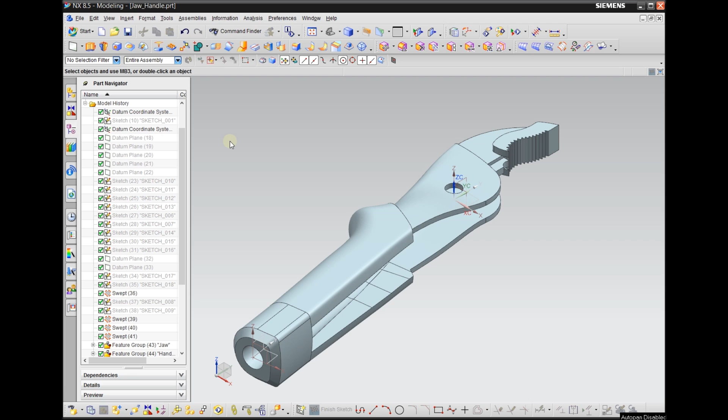Okay, this is a video on how to make the jaw handle, and there are detailed steps on the slides as well as the dimensions.

So here is the jaw handle, and how it's made. It's made of the first part, that's your jaw, which is actually the same as the lower jaw.

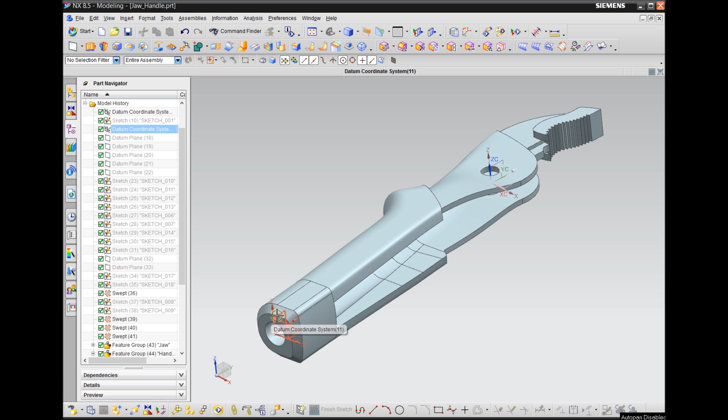Okay, and this is your metal part. So you have your metal, the real thing has the metal handle all the way to the bottom, but in modeling we only model the bare part of this metal, and coming down it's your grip. There's a rubber grip outside of the metal handle. So for the model, we're gonna model this whole piece down here as your grip.

We use two swepts for this metal part. We swept the outside shape of this metal part, then we also swept the inside. Then we use subtract to cut this part.

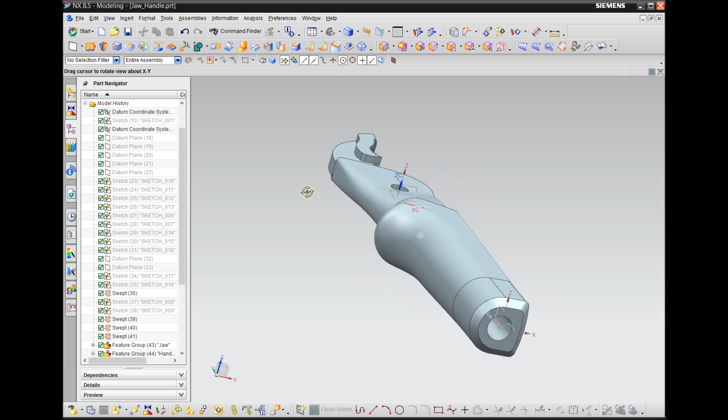And for the handle, the grip, we also use swept, because this shape is kind of very hard to extrude or make using other methods. You're welcome to use the method for the handle which is all extruded, and you do edge blend, and it's gonna be a little bit off here, but that's fine.

So this is also two swepts. You have one swept for the outside, and the second swept to cut into this grip.

And later on, for this part, it's gonna be an extrude. So you can extrude all the way to the bottom, then you do edge blend or chamfer, but chamfer will not give you the same radius here. So I used a swept, and this is a very simple swept, so don't worry about that.

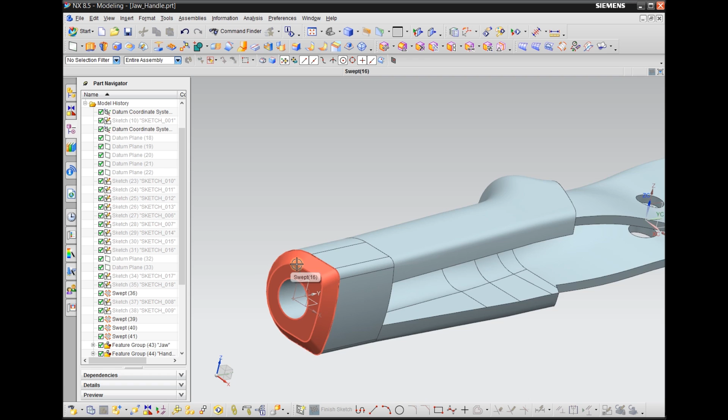Okay, so now let's start with the jaw and the metal parts. Probably this grip is gonna be in the second part of this video.

Okay, so let's build a new file first. It's gonna be model, and just keep this name, or you can rename that, and choose inch as your unit.

So I'm looking at the slides, so I will follow the slides. So first, actually we don't need to build one. Okay, so first you want to open your lower jaw.

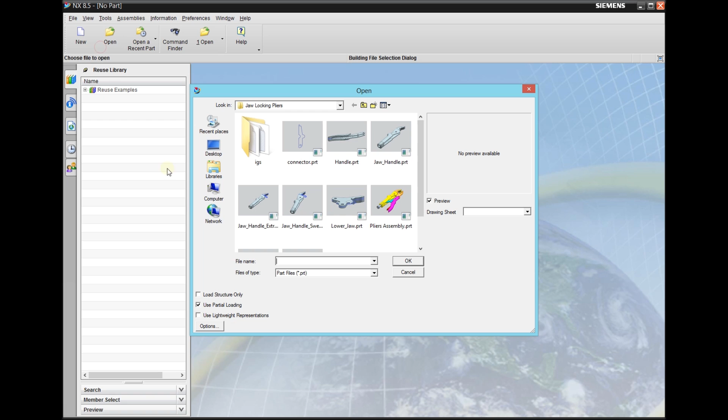Since these two, the left and right jaw, are the same shape, you don't want to do that again. Okay, we can save as this file, and you can call it jaw handle or anything. So now we are in another file, and then NX just closes that lower jaw file. So all of this will be our jaw handle.

And if you notice, the geometry here is actually this cutter. On the lower jaw it's a blade, and here it's actually like a cutting board. It's flat here.

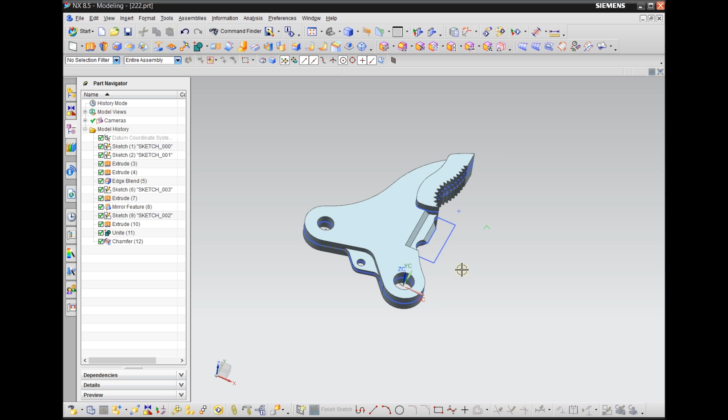So go back and modify this sketch. Okay, and apparently we will have this. We can keep this, but we're gonna delete all the stuff that we don't need.

That means this too, we don't need this little ear, we can delete it, and we don't need that sketch either. Just delete that.

And let's see what we have in the first sketch. Okay, for this sketch, you want to modify it into the shape that's listed in the slides.

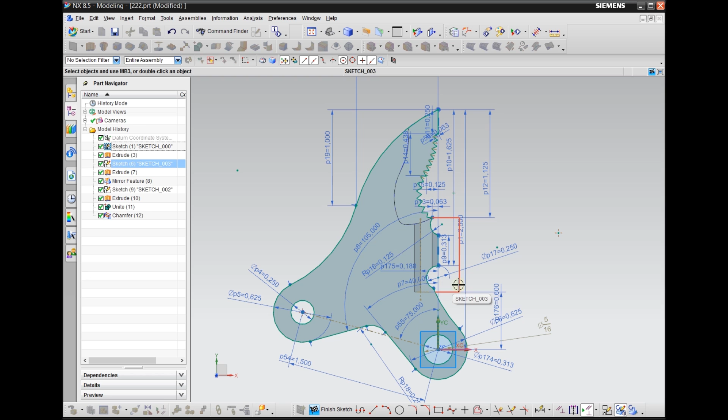So switch to wireframe and hide the extrude. Okay, maybe I can also hide this, hide the teeth. We don't really need to do anything for the teeth.

Okay, and here we don't need this. We don't need either of these two circles, so we can delete all the stuff here.

Alright, and if we look at the slides, the dimension is from this point to that point. Well, I need to delete this first. It depends on your sketch really, so everyone has different sketches.

And I'm gonna extend this curve first. Okay, so I just pick the x-axis as the boundary curve, and then we can extend this curve.

Alright, so the length of this cutting board is, I don't know how much. I only know the height of this cutting board though. So I can use a curve to cut this and give this curve a dimension, which is 23 over 32.

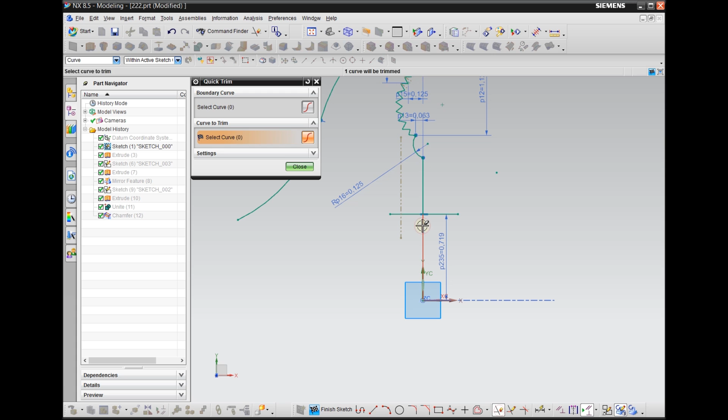Okay, and we can use quick trim over this, then you can delete this curve. So we have this cutting board down, and we don't need this curve actually.

Okay, delete this, and you're gonna keep this curve so the top can match your lower jaw. And let's see,

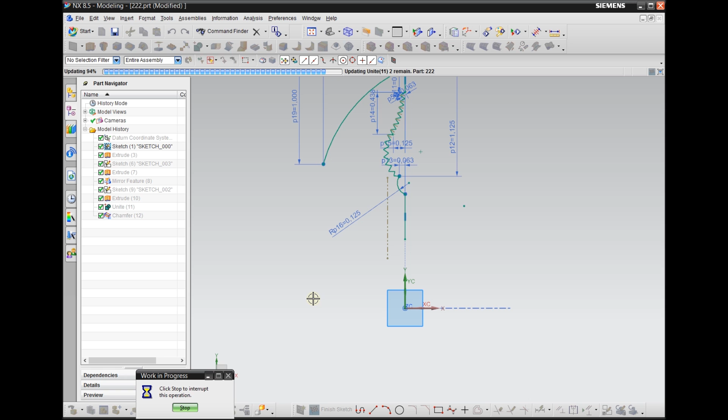Did I put any dimension there? I don't think so. Well, okay, let's measure from the... yeah, it's gonna give me an arrow. Doesn't matter, I'm gonna measure from this.

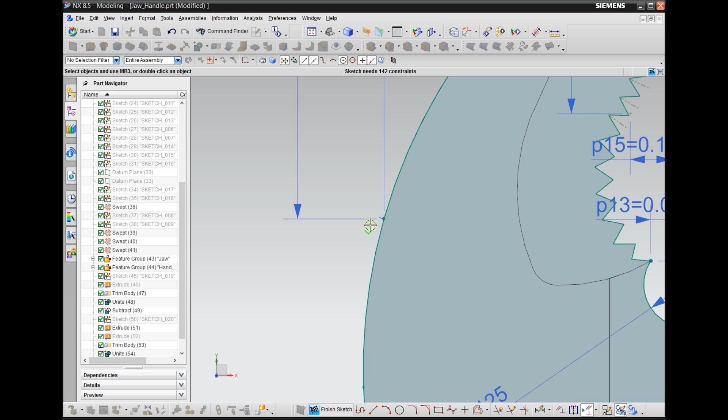Show parents. Show parents. Okay, then this is our sketch, and okay, I have a tangent arc here all the way down, and

What about the radius? The radius is 39 over 64. So you don't have to have the same shape as mine, because everyone has a different shape. Okay, so I'm gonna do this as my shape, 1 plus 39 over 64.

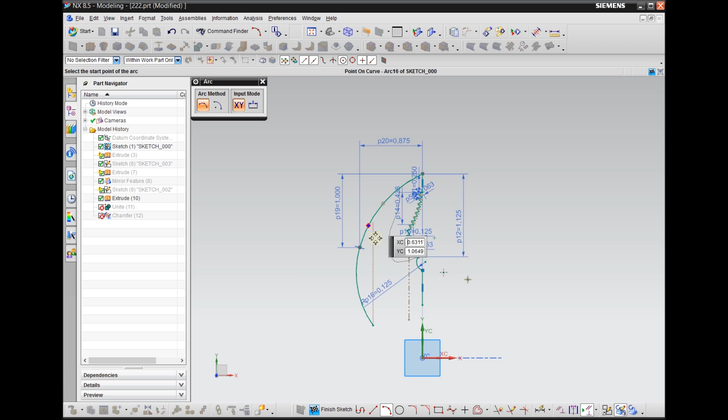So we're gonna use this 3 point, first point, and I don't know where the second point is. I just click anywhere and make it tangent. I guess I don't really need to measure that. Make sure this point is tangent, and this point has some dimensions. We'll have a look from this point to the origin is 31/64.

Close this reference, we don't want to use reference. Here to here, it's 31/64. Okay.

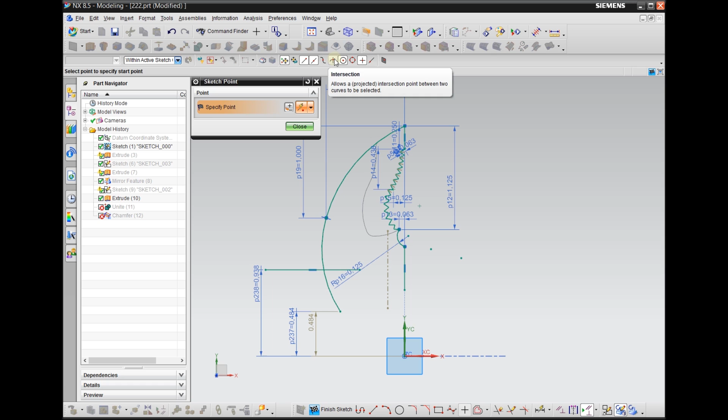I've drawn the line here, a horizontal line, put a dimension, the height of this line is 15/16. That's gonna be the reference point here. We're gonna add one point here, but also we need to add one point first, and make sure you use intersection snap. Snap to the intersection, close, and we can make this line to reference. Let me add this dimension from this point to the center. In my geometry, it's 15/16.

So you don't have to do this because the bottom part, they're gonna enter the metal part, so they're gonna bury it in that metal part, so this shape does not really matter that much. To me, I want to make sure, well, let's finish this first. We'll come back and modify this. The extrude gonna be screwed, but don't worry about that.

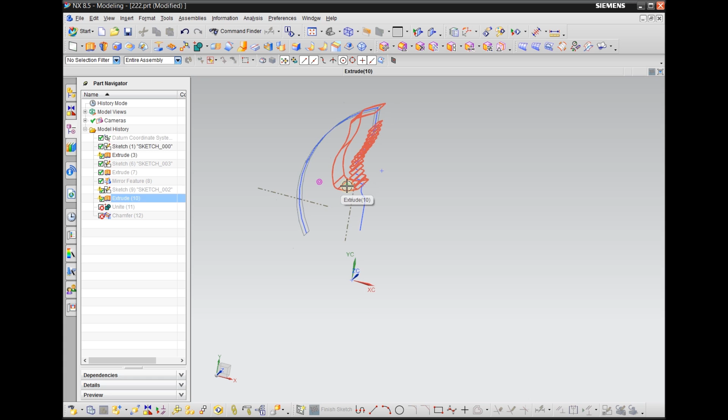Chamfer, we don't need that chamfer too. Unite, don't need this. That extrude, yeah, because I modified that. Modified this. I'll just stop, don't put this dimension now. Keep everything as usual. Delete this, delete the unite, depends on what you have.

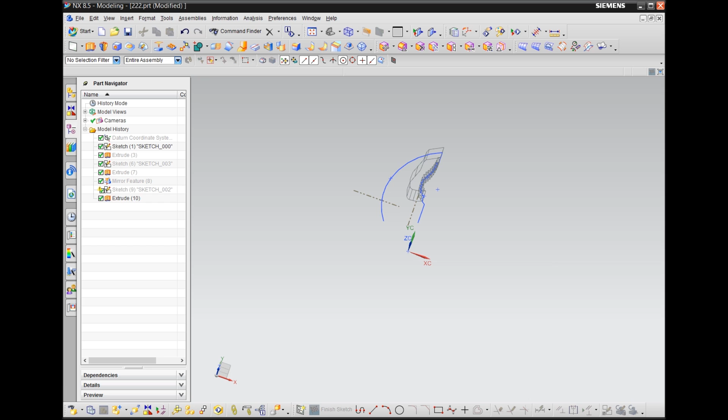We can add the second datum coordinate system for the handles. Though the handle part, they're gonna be tilted. So come here, datum coordinate system, and I think we first need a reference line for that datum system.

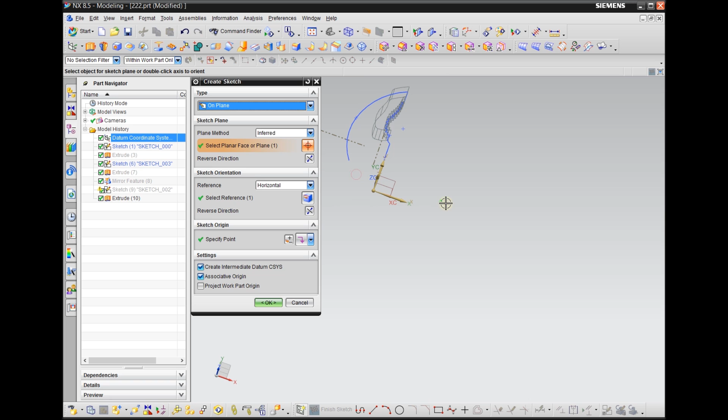So we need a sketch. Click sketch on y-x plane. I need to show the datum, first the datum coordinate system, okay, gonna be y-x plane. Click OK, and I will need a reference line. That's the direction of your handle. Turn that into a reference.

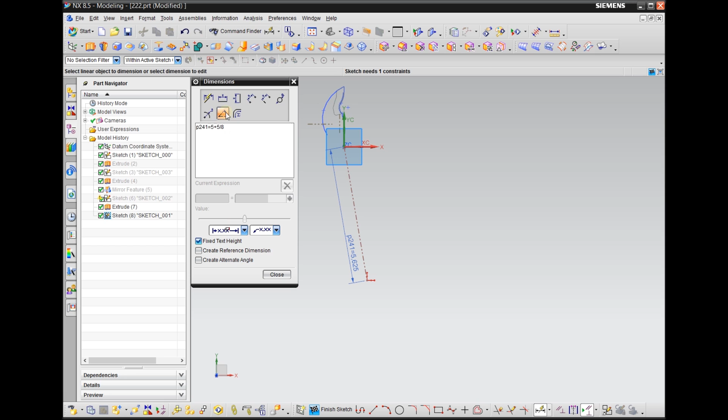Now we add constraints. We can use parallel dimension for this. The length is 5 plus 5/8. Now we can do the angle dimension. We can pick y direction, and this line, the angle here. Actually I didn't want that. Well, so in the slide that's 8 degrees, so 180 minus 8 degrees, 172. Press enter, click OK, close.

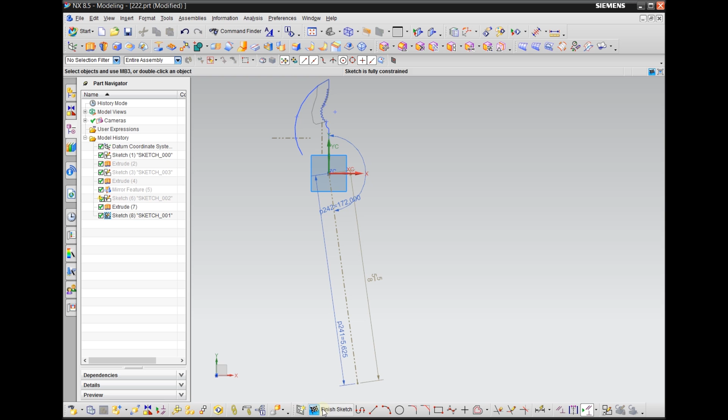Then we can add the datum coordinate system. We can use origin, X and Y. That means we need another reference line, so come back to the sketch. We need another line that's perpendicular to this, so we can have two axes when you pick the coordinate system. And we are done. Make this reference. The length doesn't matter. Finish sketch.

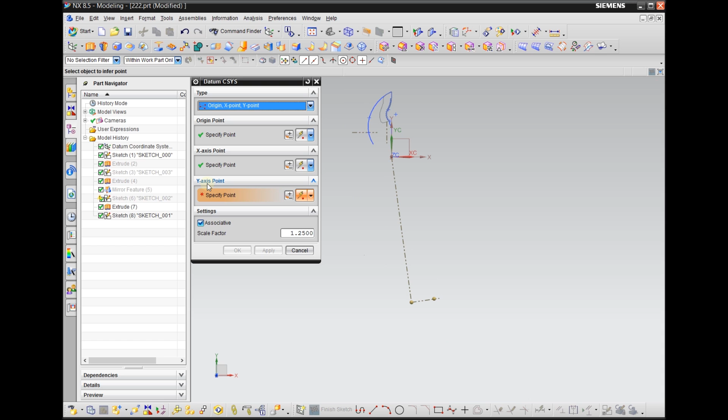Click here, datum coordinate system. We're gonna use origin, X and Y. So first specify the origin point, that's gonna be here. X, so our original X is here. We can pick this as your X, and we pick the point on Y-axis, gonna be on this. We can pick this point. So you have Y-X, and click OK. Now we have the second datum coordinate system.

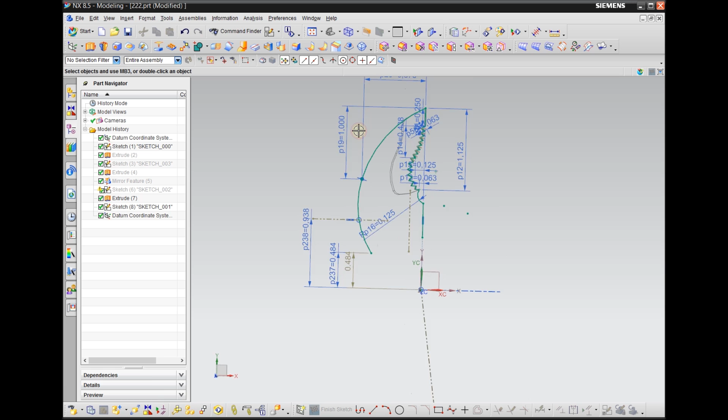So why do I want this? Well, the lower handle is tilted, and I think this point is, yeah, so this point is not that easy to find, huh? Radius.

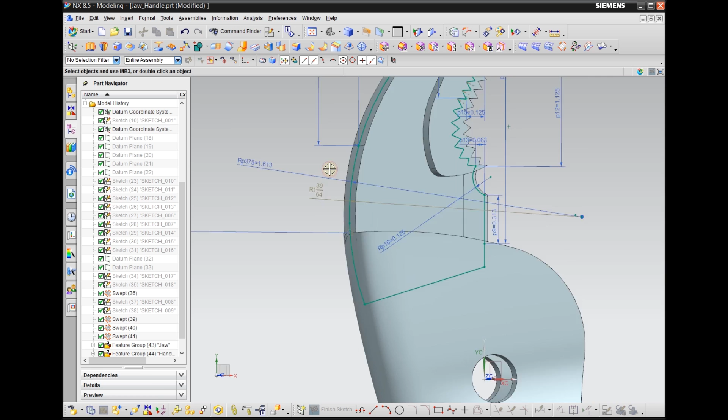Nope, I want this. I don't want a reference, I want a real one. Close. And go back to my jaw handle. Measure the radius, that's 1 39/64.

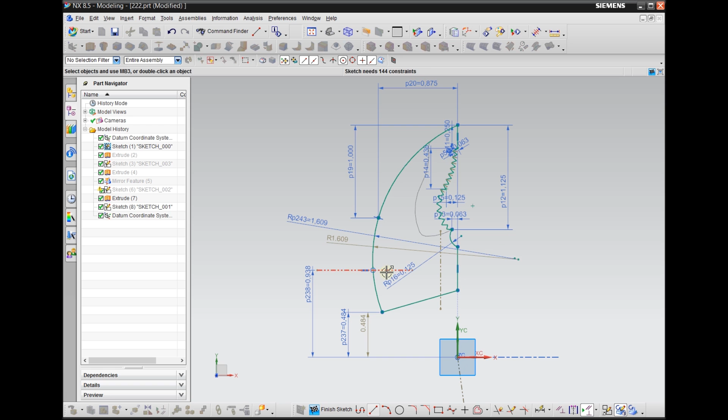I'm trying to fix this, 1 plus 39/64. I think that worked. Okay, it's still there, and it is still here. Also another line. So now it matches the shape in the slides.

Let's have a look, finish the sketch. A lot of warning. This extrude is weird. Once you double click that extrude, everything should be back. If not, you can always deselect the curve, and that's what I'm gonna do. Deselect, and let's try connected curve. So it's gonna be symmetric at 1/8. Click OK, and show it.

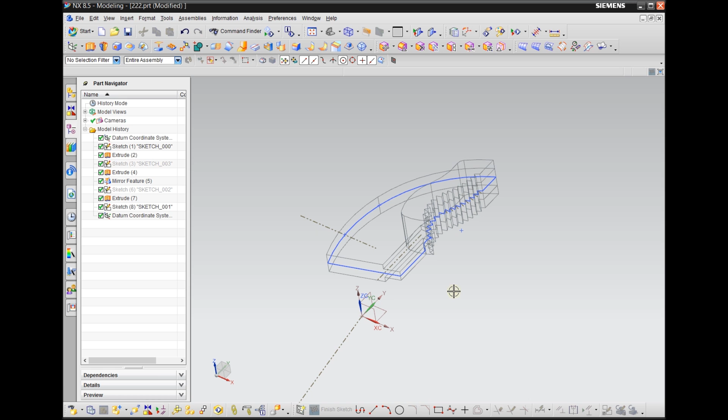So since we have cut, we have cuts here, you don't have to modify that already. So we have this and that, now they're two different solids. We can unite them together, or we can just leave them alone. This sketch, yeah, we don't really need.

All right, so we are done with the jaw part. We can come down to the metal part, the metal handle.

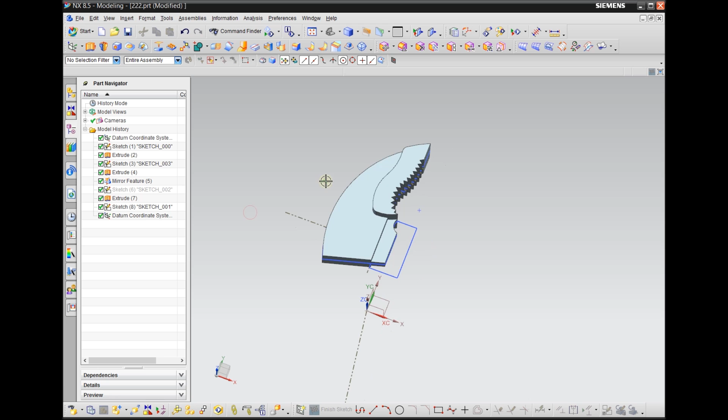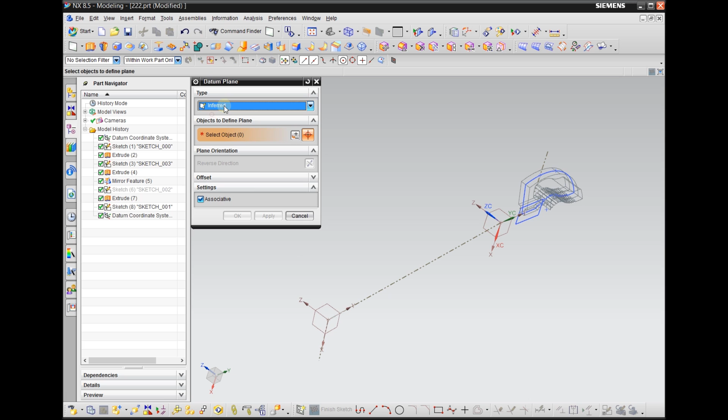So first we're gonna build 3 datums for your 3 cross sections. The first datum gonna be at a distance from the bottom of the handle. Try to pick this. Okay, inferred. Oh, we should try that distance actually. So this one, the distance of this datum is 3.9375.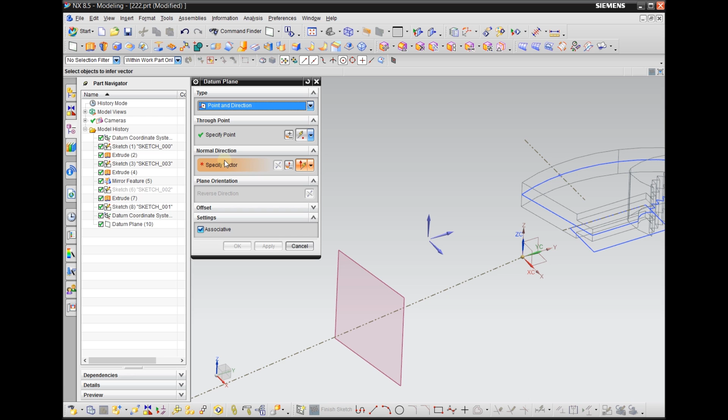And the second datum is gonna be on the origin of your absolute coordinate system. So now we're gonna use the method point and direction. We need to specify a point, that's gonna be origin. And the vector, we pick this reference line. So this datum gonna be normal to this reference line. And click apply. Okay, and you can have a look, they are perpendicular to your reference line.

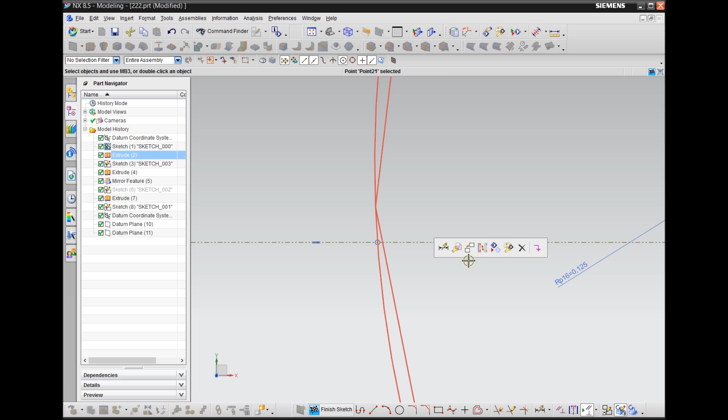And the third one, let's cancel this first. Third one is gonna be on this point, the one we just added. So what we do is we can turn this point to reference. Okay, hover and then quick pick. Turn this to reference, or we can just leave this alone. But I like them to be reference, so they will not be modified.

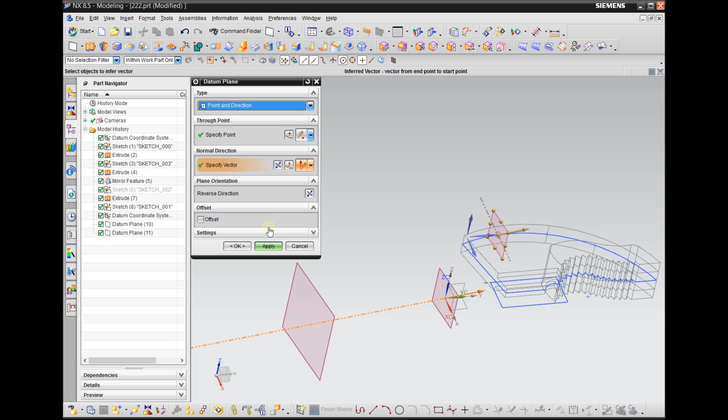Okay, the third datum, again, it's gonna be point and direction. Specify the point, it's gonna be this point. Okay, be very careful of picking. So end point, no, I don't want existing point. Okay, existing point. Pick this, and the direction is this one. Okay, let's have a look first.

All right, now we have 3 datums, and if you don't like the shape, you can move it around, and put the point back. Well, make it bigger.

Yep, so here are our 3 datums. So next we're gonna draw 3 cross sections. So let's start from this one.

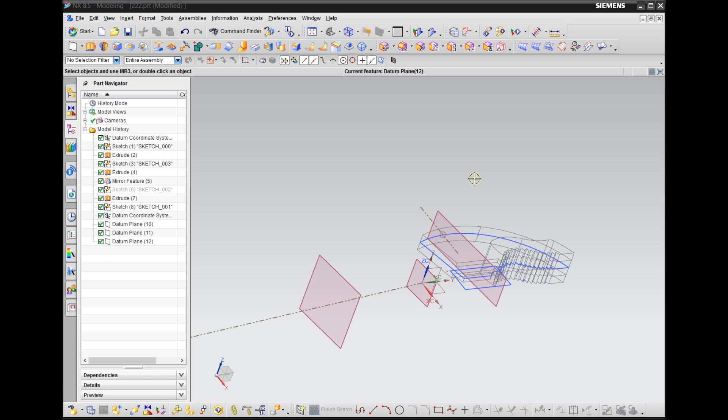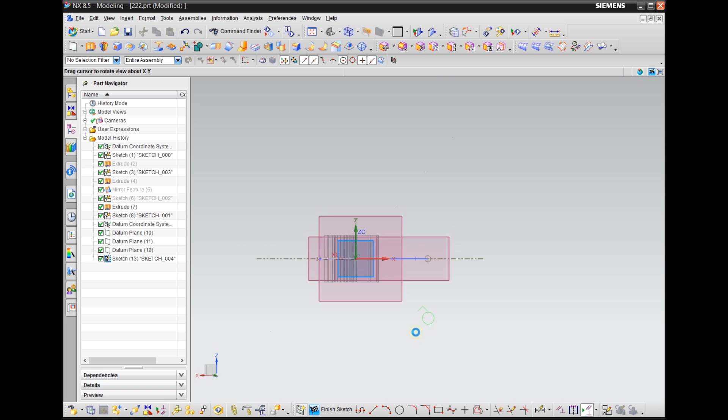Okay, sketch on plane, gonna be this, and we can, sorry about that, we can try to flip the direction of your coordinate system on the sketch, and try, well, by default it should be on this curve. Well, it doesn't matter really, you can just go ahead, proceed, and hide this, and I'm also gonna hide this. We're gonna leave them alone for a while. We can hide the two other datums.

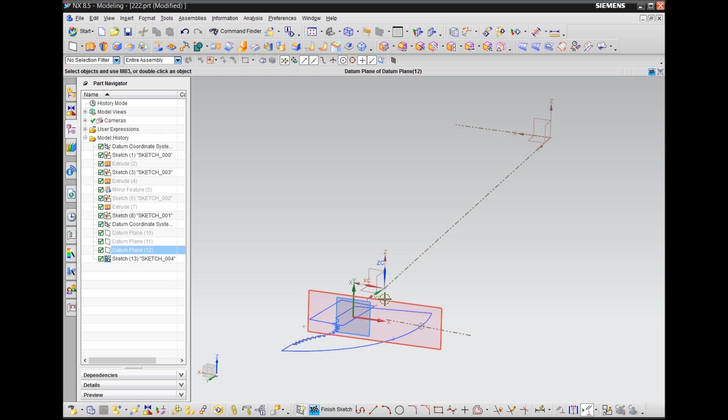Okay, and then we can start to draw on this sketch. So Shift F8. Okay, if you press F8, look, it's tilted because our datum is not what you'd say, it's not the X, Y, or Z principal planes on the absolute coordinate system.

So we have to do this, and okay, let's see the dimension. The dimension is, first it's a box-like shape. So basically we're gonna do, okay, we can maybe have a reference line.

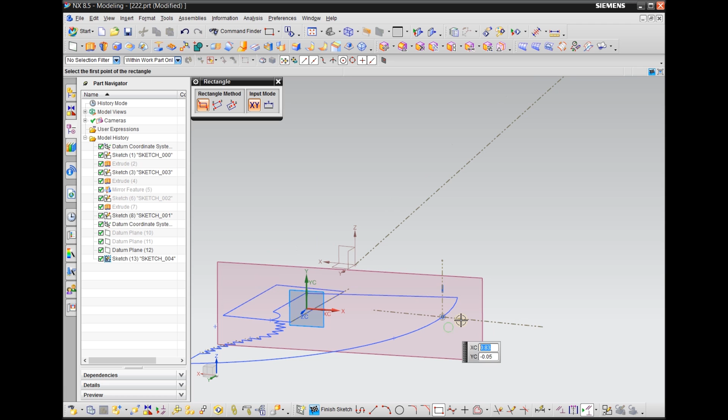Okay, a reference line. Then we can start a box, because our box, the edge of the box is gonna go across this reference point, and Shift F8, box, 2-point box, about like this.

Then we gave it some dimensions. The height is 7/16. The length is 1.75. Okay, and also we want this to be in the middle of your axis, so we can put another dimension from the top line to the center of origin, to sketch origin. We can put it as P255, which is this, the height of the shape divided by 2.

Okay, now you see everything is green. Alright, it's constrained.

Okay, and next step is, we don't have to do the fillet right now. We can do the offset. So this is the outside of your metal part. We also needed to have another closed loop when you do another sweep, so you can cut into this metal piece. So that's gonna be, we can use offset, and the metal part has a thickness of 3/32. That's the thickness of our sheet metal.

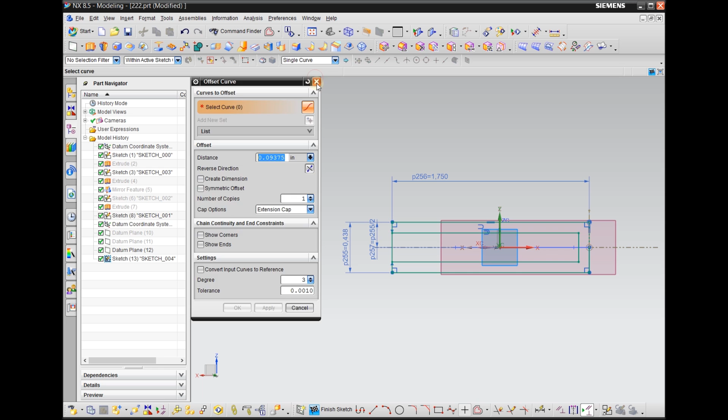Close this. And since we're gonna cut into this box, we can have this inside loop be somewhere outside, a little bit longer, sticking out from the outside box. So we have here, we can use quick extend, extend. Okay, so now we have two loops. One is the narrow one, and the other one is a box.

Now we can do a fillet. So the fillet is 5/64, and we're gonna fillet this corner as well as this corner and this corner. And I'll try to click OK.

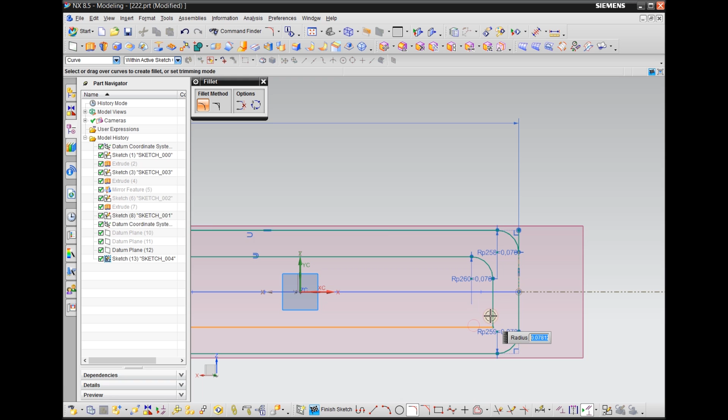It's 5/64. Here and here, this here and here. Okay, close this and make sure the curve is right. So I think I just filleted here, filleted my reference line.

So we need to trim away this excess line here, and my reference line apparently is buried behind this, and you can actually delete that. You don't really need that. Okay.

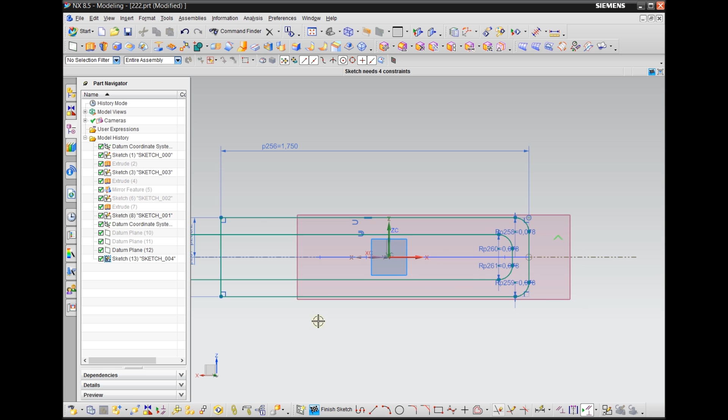Alright, so let's finish the sketch. Now we have two loops, outside and inside. This is for the first sweep sketch. Okay, and since we are done here, we can hide this.

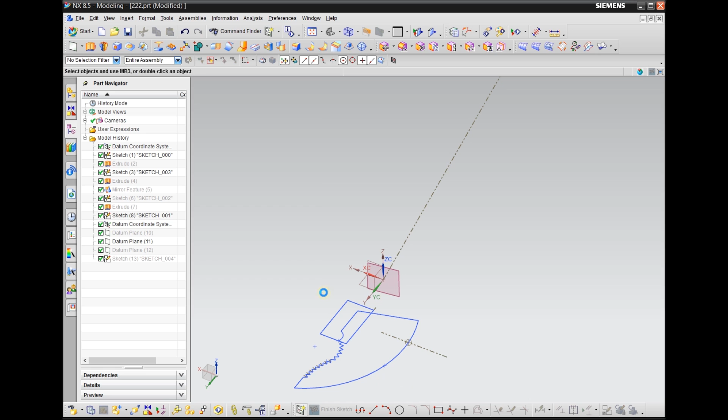Let's show the second sketch, second datum. The second datum, build the second datum, and you can use a flip, you can keep it like this. Click OK, and Shift F8.

Alright, so second datum, the second one, we have... second one, box. Okay, two box, the same thing, and

go back to sketch, another box. So here we use a different approach, two box for two, close the loop, and the dimension. Height is the same, 7/16.

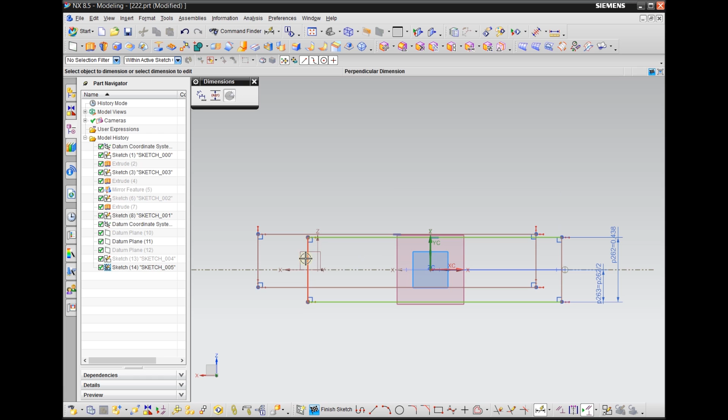Okay, and since we are here, we can put this, we can make sure this is center. 262 divided by 2, enter. Okay, and then the width. So here we don't use width, we use here one edge to the orange, and that's gonna be 5/8.

Okay, and this side is a little bit complicated, let's see what we can do. We can maybe use a circle more easily. And a circle, I don't want to snap to any other sketch, so I'm gonna hide this first.

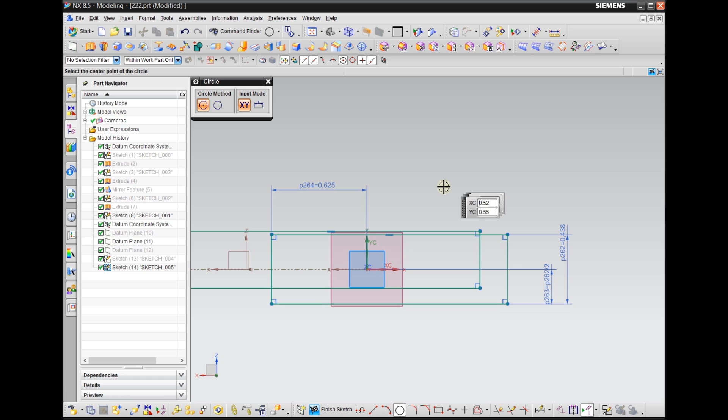they will match each other, and let's trim away. Wow, it's gonna be complicated. Okay, I'll just pick this line, delete this, trim this away, trim that away, also trim this.

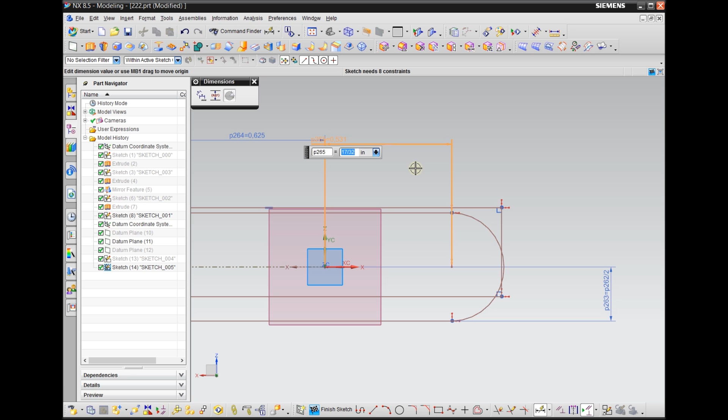Okay, so dimension from this arc to the center of the orange, it's gonna be 17/32. This is down, and okay, I think this shape is pretty much done. Right? If you want to constrain this, just put the dimension there, and we can put another... yeah, that's pretty much all we need.

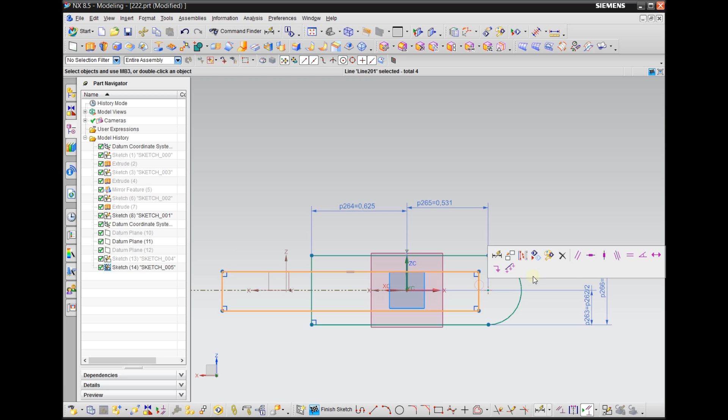And for this little box, I think it's still better to offset, so I don't have to draw that circle again. Again, the thickness is 3/32. So pick the same single curve. Okay, click OK, that's our inside, and just make that thing sticking out a little bit.

There's no dimension on the sketch for this, so that means the distance really doesn't matter as long as you can make them sticking out. Okay, finish, that's our second sketch, and we can hide this.

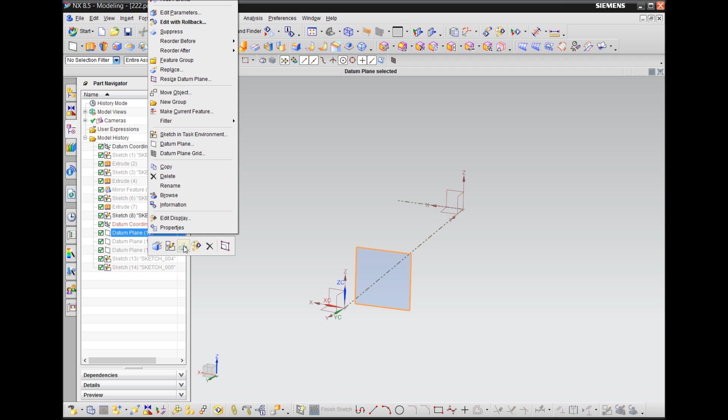We need the other datum. So for the third section, okay, third section.

Again, that's box. So, well, or we can make circles. Well, let's make box first. Box and a circle. That's a basic shape, and trim away.

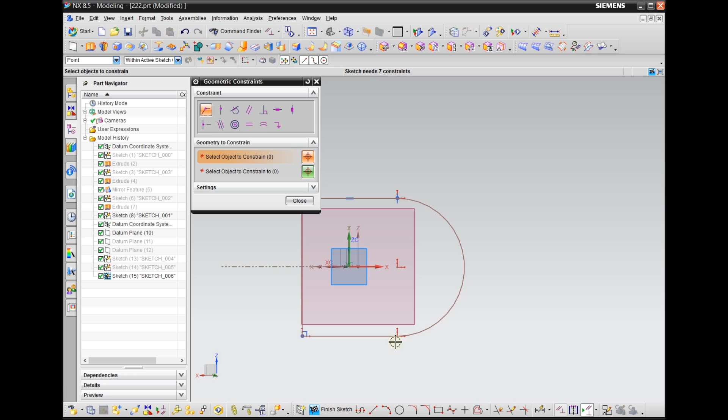Okay, then also I want this point to be on that point. Close. There's a coincident constraint. Alright, dimension.

Dimension is dimension radius 7/16, and this should be... you don't even need to input this 7/8, because it's double the size of this. Okay.

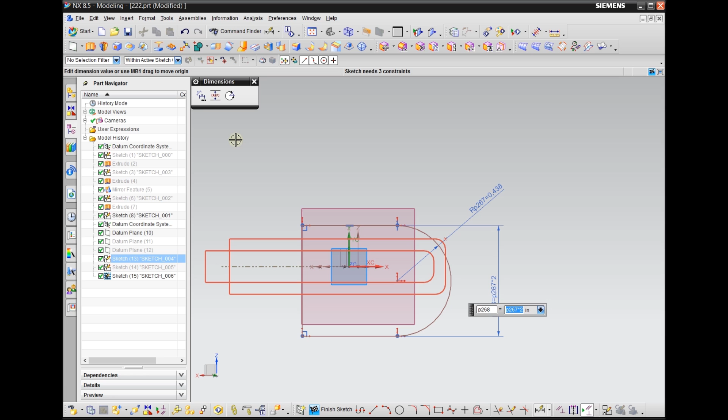Or what we can do is we can put P267 times 2. Okay, enter. And make this center and put 0 here. And the center of this arc to the center of this orange.

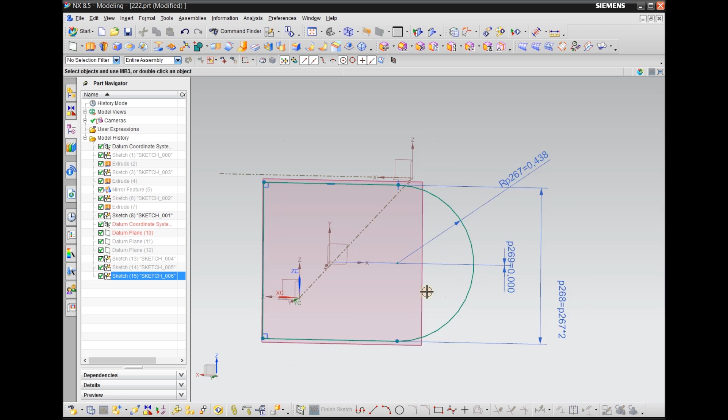Alright, we have a problem, we need to move this orange. But when you build this sketch, you want the center to be on this curve actually.

So what we can do, let's try, we can add a... okay, we can draw first, we can draw a horizontal reference line. Okay, put this to reference and add another point here, intersection. Hopefully this will work.

Okay, no, this is not very good. Okay, let's try intersection, it's here, intersection. And sketch. Okay, that's the sketch.

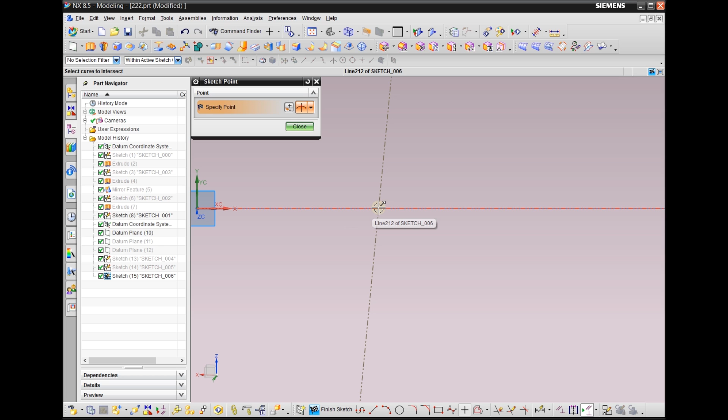Intersection. Not very good. Okay, let me think. Maybe we need to ditch this sketch then. Ditch this, build a new sketch.

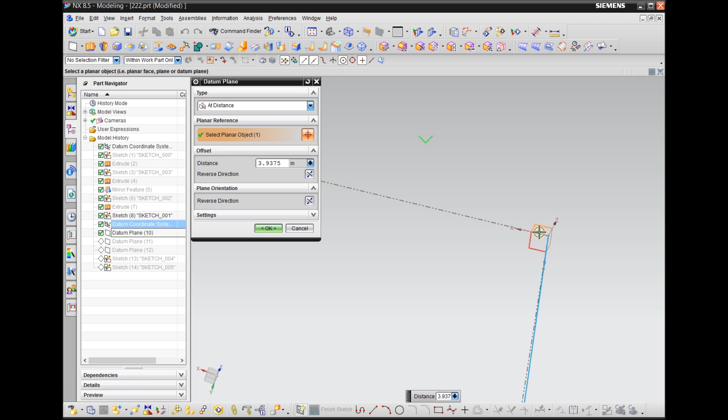And the reference point. Or we go back, modify this. Okay, that's our problem. Alright, it seems like we have a big problem here. This direction is not right.

So, okay, I guess this problem is in this coordinate system. Alright, measure angle. I suppose you will not have the same problem as mine. Okay, and I think I can modify this.

X point. Yeah, I see this point is not right. So X point, go to end point. This, okay, and that's gonna be another end point. End point. Okay, now they're matched.

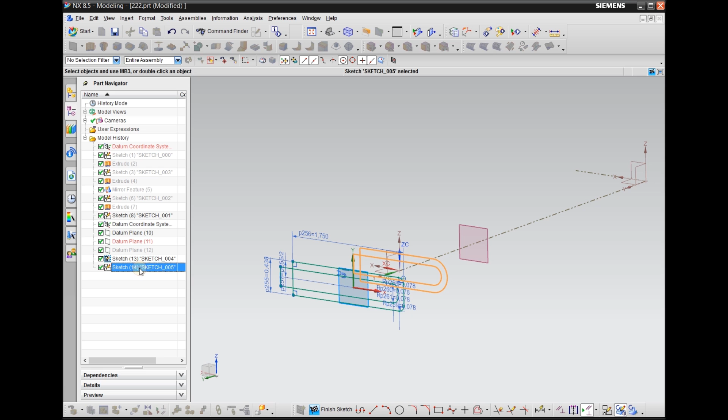And let's have a look at the second datum. No, first datum is fine. Second datum. Yeah, second datum is fine too because it's on the absolute origin. Okay, and we're good on this.

Height, and try to build a sketch here. Now it's on the curve. Okay, very tiny mistake. Made everything a mess. Okay, alright.

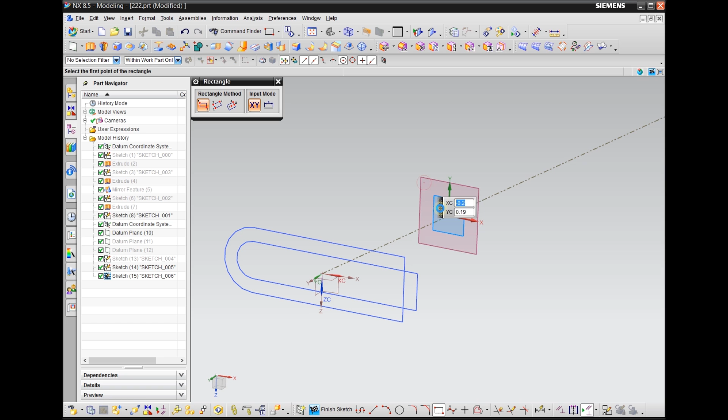Maybe we need to show this a little bit to get the orientation. Okay, first box. Second, a circle on this side, and trim away, trim, close. I want that to be coincident. You have coincident here, and coincident, so point to this point.

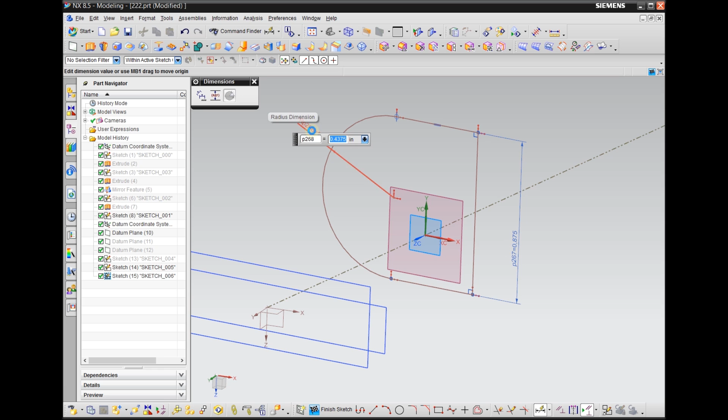Got it. Okay, then dimension. Dimension is 7/8. Oh, it's pretty big. Okay, and this should be a half of this dimension. That's gonna be p267 divided by 2. Okay.

This way, make sure everything matches each other. And lastly, we want the circle to be on the x-axis, and you can see these two lines are fixed. And also this to the center of the circle is 13/32. Okay, and the center of the circle to the origin is 3/32.

Now the whole thing is green, and it's good. We can turn off this. Okay, next thing, as usual, offset. So we can offset this. Alright, click OK, and put a straight line here somewhere.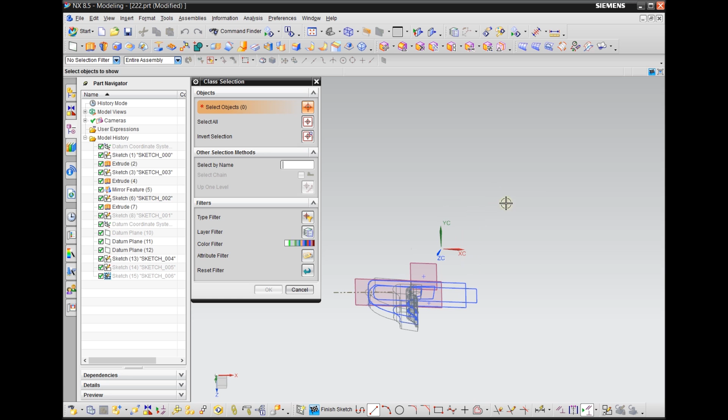Okay, now we can use Shift 8. Well, optimally you can—the outside of these three curves should be pretty much aligned. So here I'm gonna align to this here first.

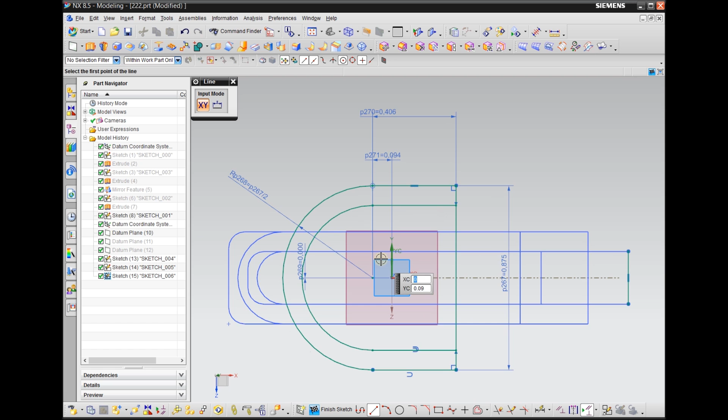Well, it's interesting. It's all about the tilted coordinate system. Okay, so it's pretty far away. Anyway, just keep doing this. Boundary curve, this one, extend 2, and boundary curve, we'll close this, do that again, extend this 2, close.

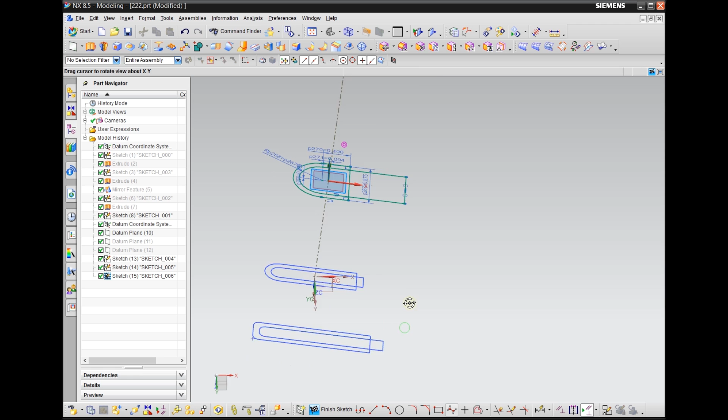Okay, so now this sketch is referenced on that one. We can have a look at the top. Yeah, they are aligned, close. We can go back and maybe put this line, okay, same as here. Not sure it's gonna move it. It's not gonna move. Well, it doesn't matter really. Should not be, okay.

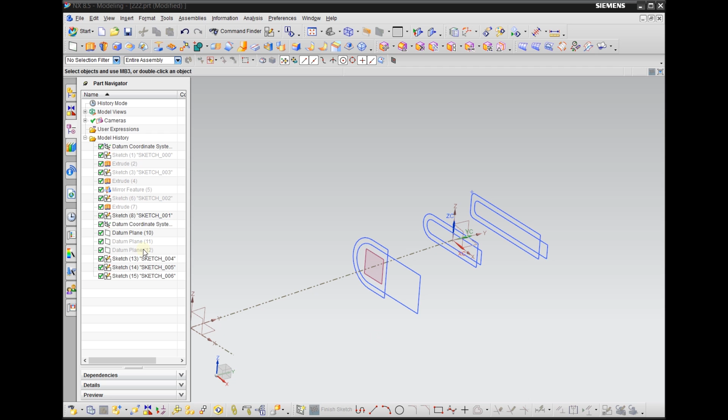3 cross sections. The next thing is the guidelines. So turn this on, and the guideline is gonna be on this y-x plane, or we can have this on that y-x plane. It actually doesn't matter. So we're gonna start the sketch on this y-x.

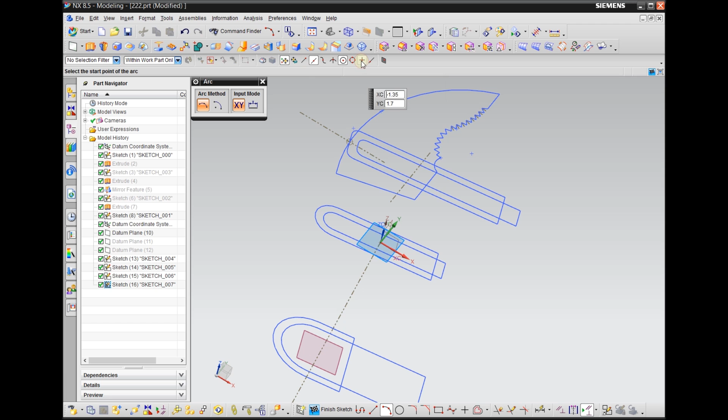Okay, and we have two guidelines. Start the first—it's gonna be an arc, 3-point arc. So we want to choose a midpoint. Turn off the other stuff. Okay, so one midpoint, second midpoint. You want the bigger loop. Okay, and third midpoint. This is one, and here.

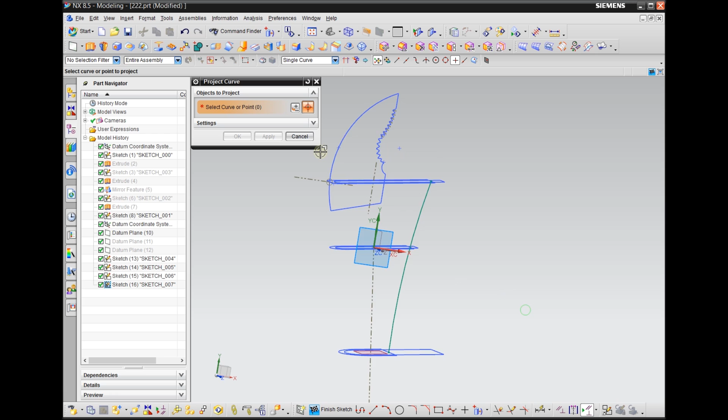Okay, first, I'm not sure if we can do this, but make sure that's what happened. First, we need a project curve from this sketch, so we can have an arc that's tangent to this arc. So we're gonna project this arc to our sketch. Okay, so for a clear view, we can hide this original sketch and turn this to a reference.

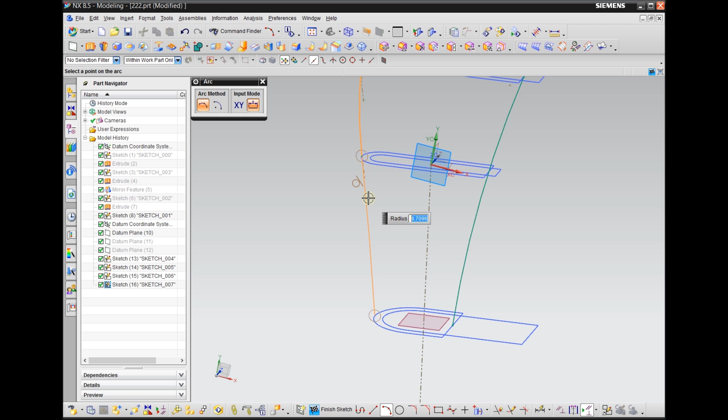Now we use 3-point arc. Okay, and the start point again is gonna be the midpoint. Second, it's still midpoint, and okay, you want to make sure that's tangent. Okay, so we have the first arc, and the second arc is gonna be from here to that point. Also, you want to make sure this is tangent to the first arc. And we're done with these two guidelines. We can click finish. So here we're ready for the swept.

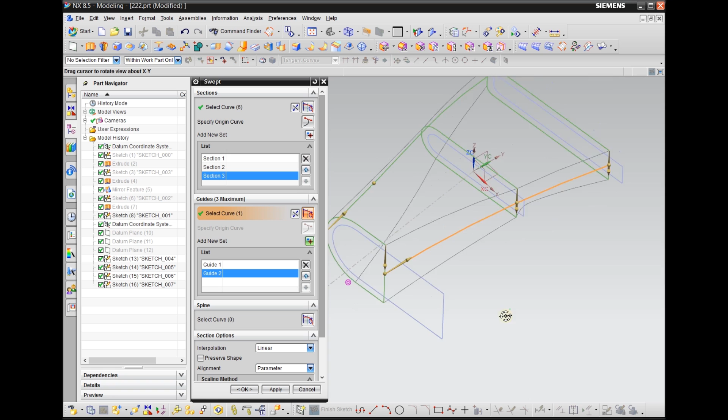Okay, now let's do it. Swept. First cross section, you want to pick the same spot. Add another set, the same spot, add the third set, same spot. So the first swept is going to be the outside of the metal, and the guideline. Okay, first guideline, and we can add another set, maybe second guideline. Alright, so if you look at here, it's kind of weird.

And we can turn on the—okay, this we need to use by point. So right away, it's much better. Okay, and we want a smooth surface, so cubic. This should give us a very smooth surface, and click OK. So 3 cross sections, 2 guidelines, and cubic by points, which is all on the slides.

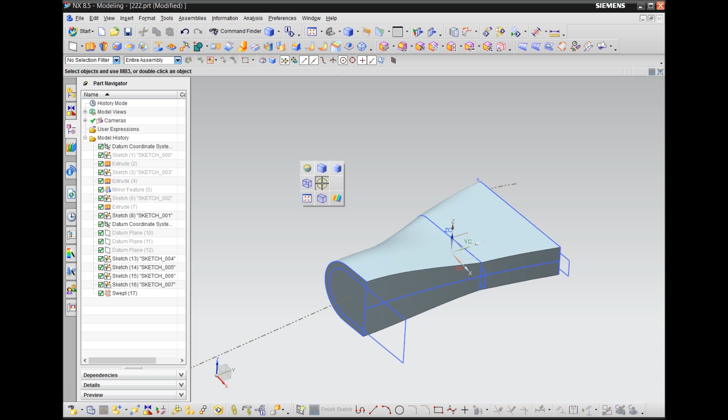Now let's sweep the inside part. Okay, let's do another sweep, and now we're gonna pick this. Okay, and another set—pick the smaller loop, and another set, smaller loop.

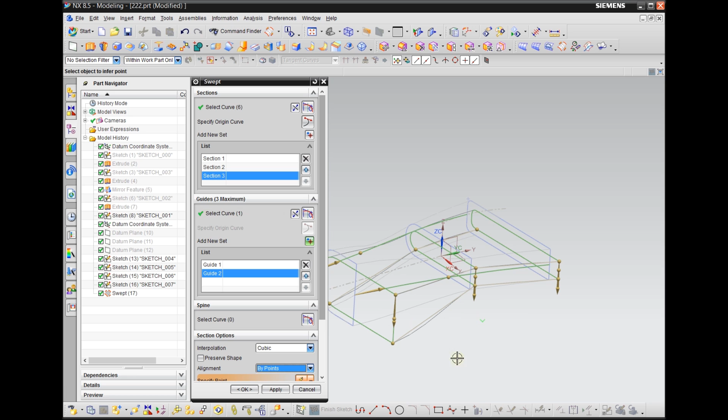Now we pick the guideline. It's gonna be the same as the outside shape. One guideline, a new set, another guideline. Okay, and also cubic by point. Let's have a look. Okay, click OK.

Now we don't cut it right now because this needs to cut into the grip actually. So, but for your reference, you can check if this is right or wrong.

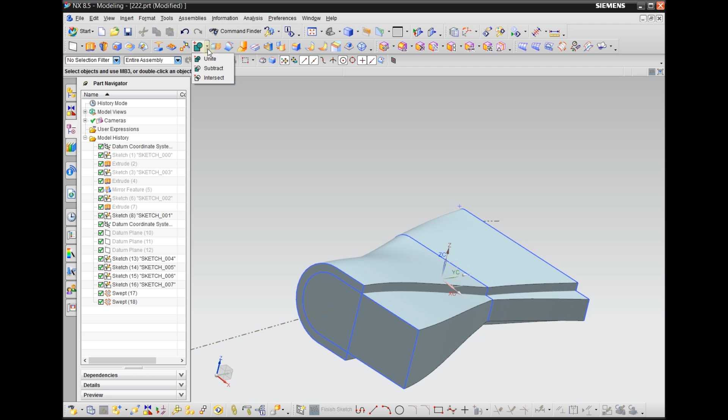So what we can do is, within this, there's no boolean here. Okay, we just use boolean—subtract. Target is gonna be the bigger one, tool is gonna be the smaller one. Click OK. And you can have a look at the shape, if they're smooth or not, and the thickness, if there's anything sticking out.

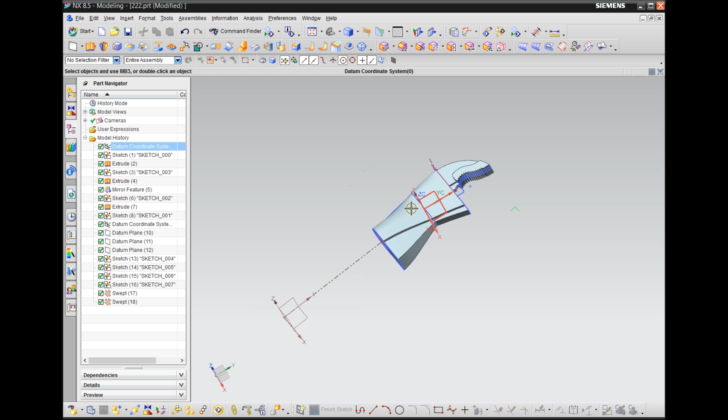Okay, if everything is good, we just go back because we're gonna cut later. Keep this. Okay, so we're done with the jaw, and well, let me show everything first. Control A. Okay, so we're done on the top part. So next we're gonna go ahead and do the grip. So that's gonna be in part 2. Okay, and let's stop here.